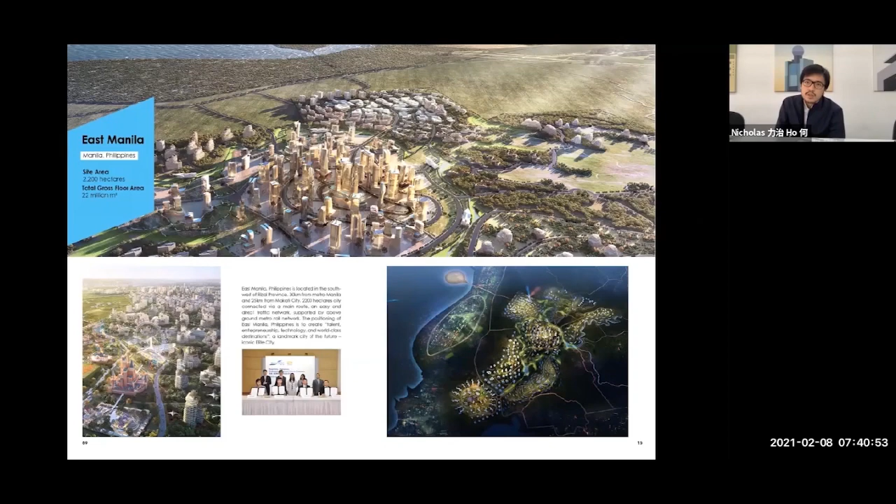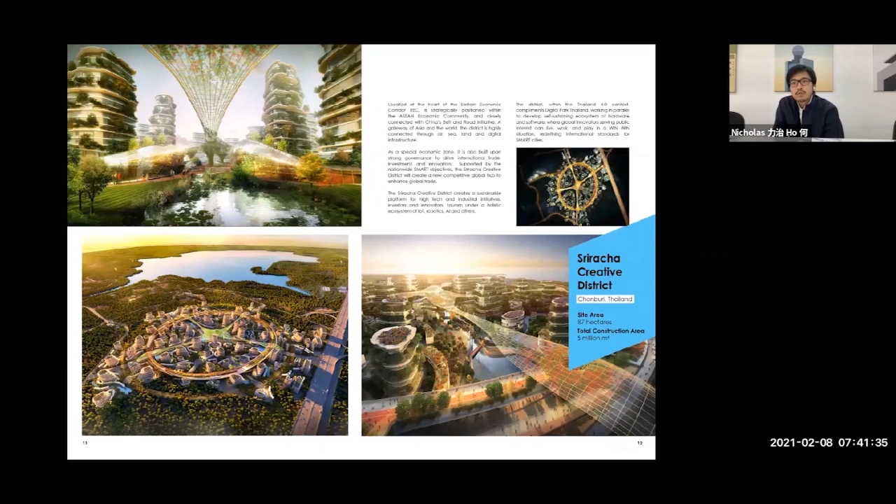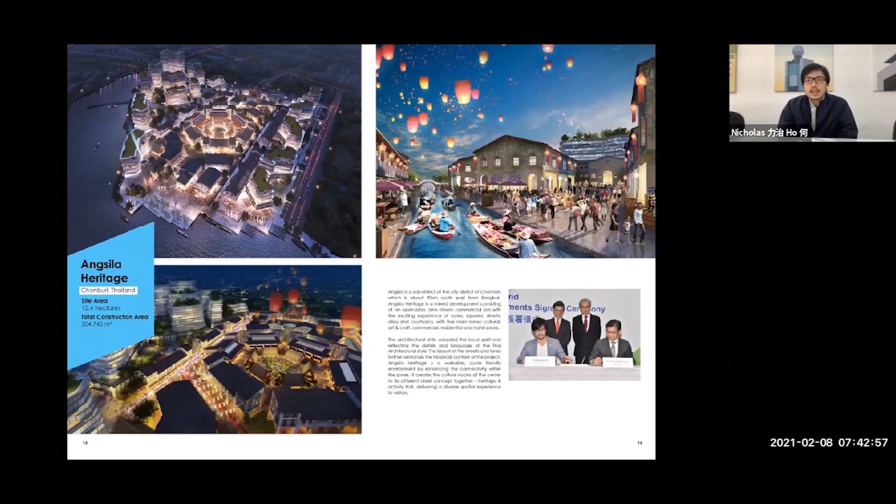So I think this is a very interesting exercise of bridging software—the people, the Thai culture, the tourism, the smiles and the friendliness—with new modern technology, to bridge that gap between foreign and local tourism.

We're very lucky to work with a lot of people on this project, not just the government and other consultants, but we actually worked with the end users to create a first of its kind programmable building. Going forward, to really push building science as technology to new levels, it's not just about us as a designer and as the building owner creating infrastructure to monitor, keep track, analyze the data received, and feed back into the operation. That's the model we're doing today.

But in the future, the concept of a programmable building is that the user can use the infrastructure we designed in place—the digital infrastructure, the M&E mechanical engineering infrastructure of the building—and the user, like a research or science park or university campus, can program the building to cater to their own needs. So this is a new concept in building technology.

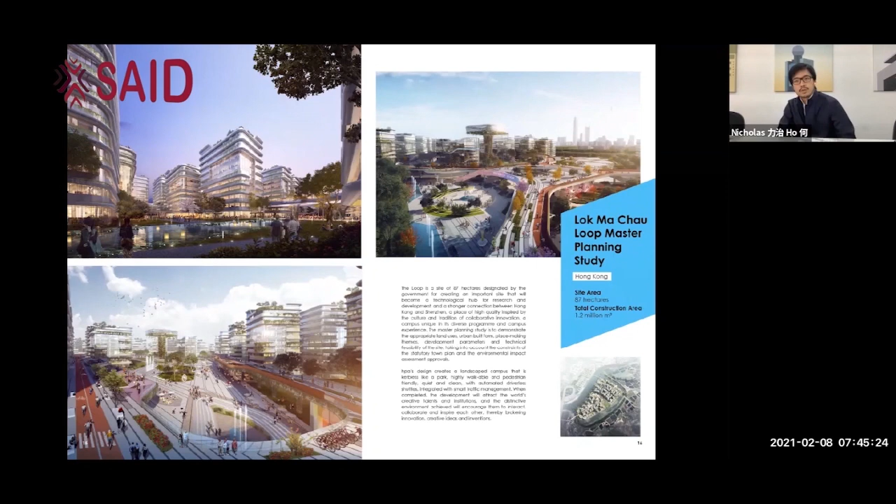Programmable building is something that we believe is the future of smart buildings. This is another smart city project in Hong Kong that we've done that's under planning.

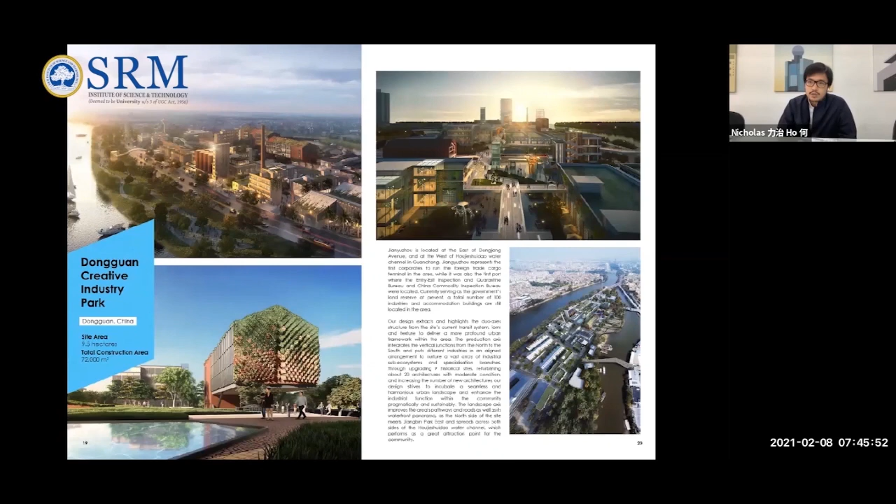This is an art district in the Greater Bay Area in Dongguan that retained almost 50% of its existing buildings, which are old industrial factories, creating a new art district using technologies and connectivity from AR, VR, and also physical connectivity and public spaces.